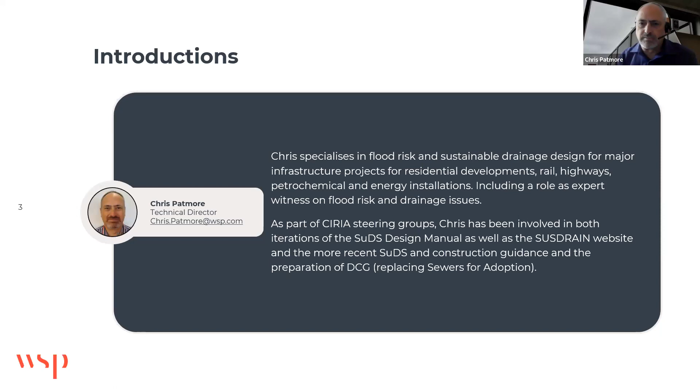So what we're talking about today is the Flood and Water Management Act, and in particular Schedule 3 as it may apply to England. I want to give you a little bit of broad background to that.

But first, I'd like to ask a question, which is, how many of the 260 odd people listening to this webinar have actually heard of the proposed implementation of Schedule 3 in England? I wonder if we could see the results... that's quite a positive result, because I asked the same question a couple of weeks ago of another audience, and it was completely the other way around. That's quite interesting, thanks for that.

So what I'm going to try and cover today, with the help of some colleagues, in particular Ian Titherington, is where we've got to, how it's come about this year as opposed to other years, but also some background as to what's the difference between guidance and regulation and why it's quite a complicated process. Then we'll finish off with a brief summary of where we think Schedule 3 will be, or what it might look like.

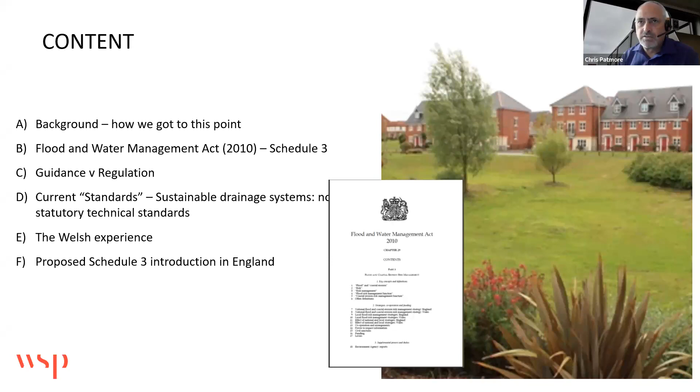So background - why has it all of a sudden come to the fore? In January, the government made a statement, and I've quoted one of the government ministers, Rebecca Pow, who said our traditional drainage systems are under increasing pressure from the effects of climate change, urbanisation and growing population. The benefits of sustainable drainage systems are many, from mitigating flood risk by catching and storing surplus water and reducing storm overflow discharges, to enhancing local nature in the heart of our developments and helping with harvesting valuable rainfall. So this is a statement as to the intent.

And the result of that was that on January 10th this year, a report was published by the government stating that they will now look at the implementation of Schedule 3 of the Flood and Water Management Act in England. It has stated at the time that the new approach is expected to come into force in 2024, so that's literally about 6 months away from now.

As a brief background to where the Flood and Water Management Act came from and its history, it goes back quite a long way to the Water Framework Directive of 2000, but it really came out of the Pitt Review in 2008 that followed the quite severe flooding we had in many parts of the country. It was one of the direct results of the Pitt Review and its many recommendations, and became an act very rapidly.

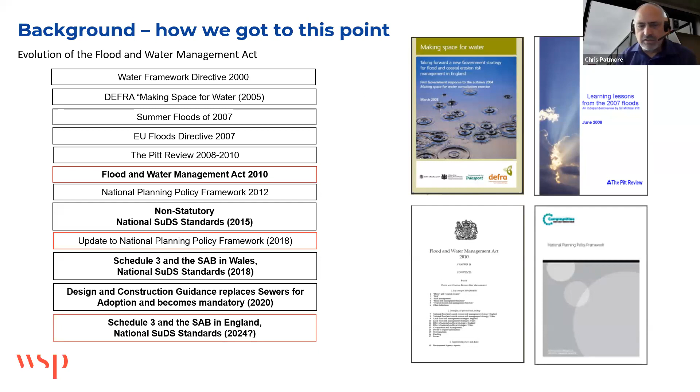So now we're looking at filling that void with a SAB in England. Now we have the example in Wales. As I said, it became an act quite quickly, and established the lead local flood authorities, but it hasn't completely fully come into being.

But one of the key elements of it is this word partnerships, between all of the flooding authorities and elements that are needed to control or maintain flood risk. And that partnership is key to what's coming with the SAB. So local authorities, as part of that partnership, we're looking at setting up agreements between other bodies, internal drainage boards, the Environment Agency, water companies, and look at developing the SAB, which is the SuDS Approving Body.

So as such, it hasn't happened in England. LLFAs were originally funded to establish themselves. And I think most people listening to this webinar are very familiar with the lead local flood authority and how that has changed some aspects of surface water management.

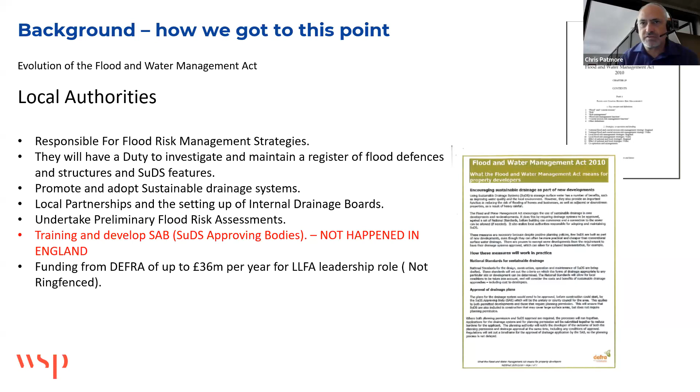On the other side of the fence, we have developers who are encouraged to use SuDS in new developments, but it's not completely mandatory in many aspects. And that's really where the SAB is trying to fill those gaps. That is where we have this shift in responsibility from water companies towards the local authority as a SAB, being the body that adopts and maintains surface water assets.

So this is a different process and a different way of looking at new developments in particular. It's not a retrospective thing at the moment.

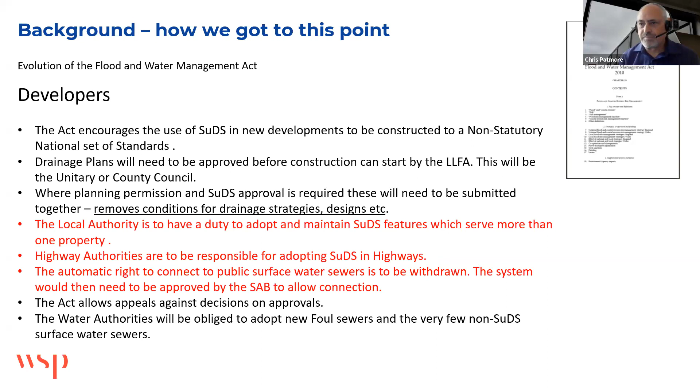So why all of a sudden now? I don't know if you've kept an eye on the industry at the moment, there's been a lot of publications coming out over the last year or so, including the Sewerage Sector Guidance, but also the new update of the manual for streets is going to have more of an emphasis on using SuDS within street and urban realm. We've got reports on reducing the risk of surface water flooding.

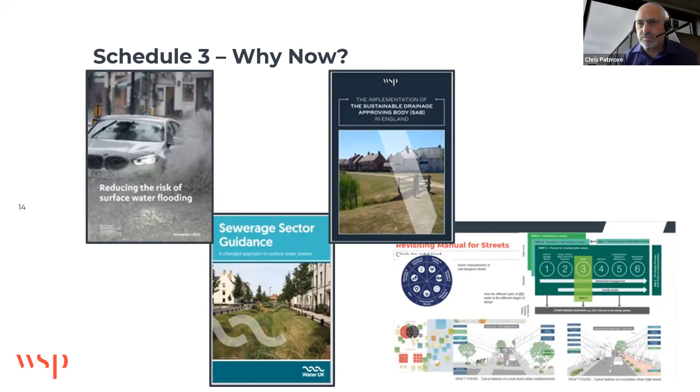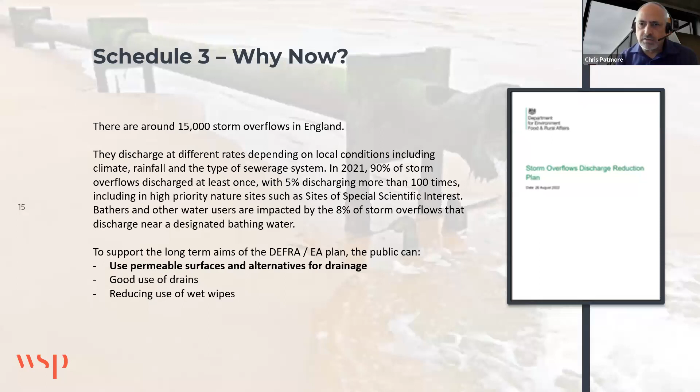We've got key reports in particular on stormwater overflows and CSOs, which again refers to SuDS being one of the options that could help reduce that incident. So there's a lot of elements that are all coming together to suggest that sustainable drainage and its implementation has wide-ranging benefits across the industry.

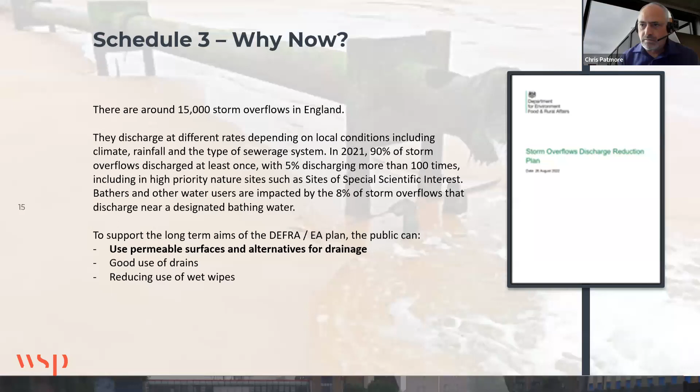So what actually is Schedule 3? It's been under review recently since 2021, and that's when the government announcement in January came out that they will be accepting the recommendation that it should be implemented.

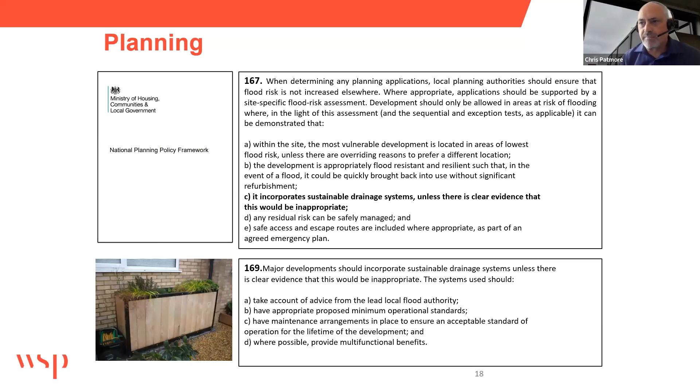The idea is that it then ties in with other documents like the National Planning Policy Framework, which has been rewritten and updated periodically, and more recently it is now getting a bit firmer, a bit more deliberate in its use of words, saying that you should be incorporating sustainable drainage unless there's clear evidence that it's not appropriate. So that has kind of pushed it forward.

We've been involved in a lot of Schedule 3 work in the past, and certainly more recently we're working with DEFRA in looking at how the implementation is actually going to work. Some of the things I'll talk about in a minute will be some of those key tasks and processes that need to be looked at to bring forward Schedule 3, because it's not just a case of saying yes, we'll do it. There's a lot going on in the background, and Ian may be able to run through a few of those from the Welsh experience as to some of the pitfalls, some of the advantages going through.

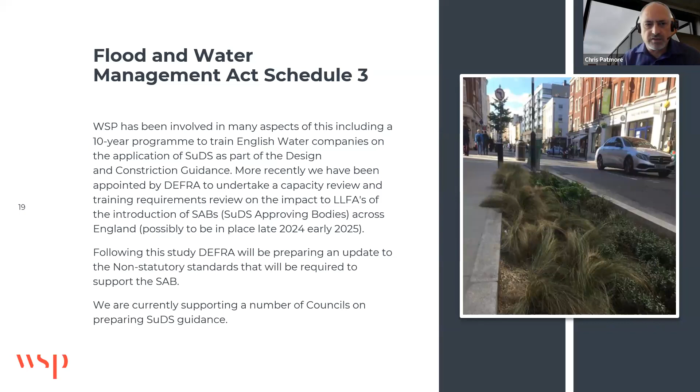So what we're looking at is something that's going to come forward towards next year, and part of the work that we've been doing at the moment is looking at that skills gap, looking at that capacity review, as it's often called, as to what's needed, what needs to change and be included to bring forward Schedule 3. And that includes a lot of stakeholders from both sides, the local authority side, the water company side, the developer side, and the planning system side.

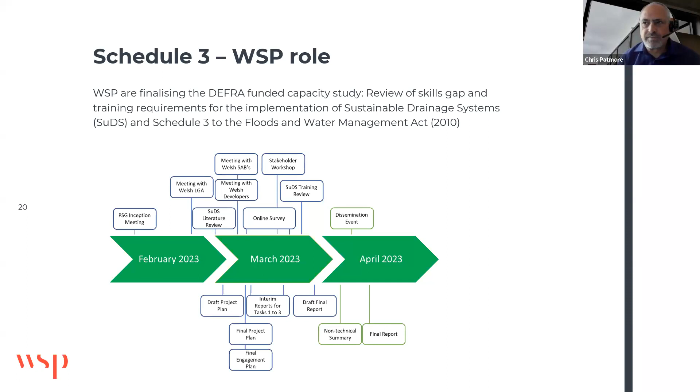What are their interests? What are their drivers? How is that all going to be coordinated? And in particular, the training side of bringing a SAB to the 151 lead local flood authorities that there are in England - it's not a small task, it's a big task. So part of this is that any SuDS delivery process is going to have many moving parts and many stakeholders.

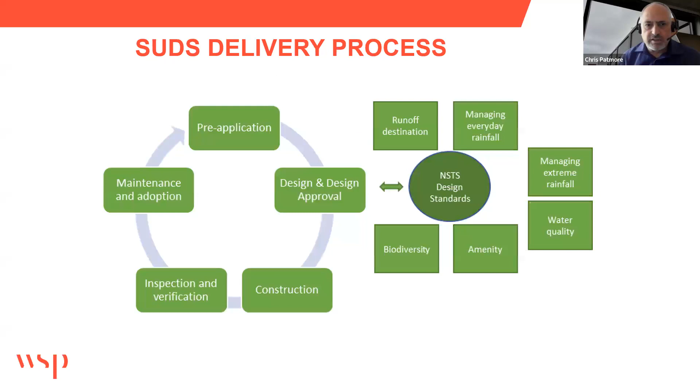It's not as simple as a pipe from manhole 1 to manhole 2. There's a lot of things that get wrapped up into the Schedule 3 and the SuDS approach to drainage, and this includes management of everyday rainfall as well as extreme rainfall. A lot of the guidance and mandatory regulation at the moment is geared around extreme rainfall events, but it's also the management of everyday rainfall events, which is key to looking at other aspects such as biodiversity, amenity, water quality in particular.

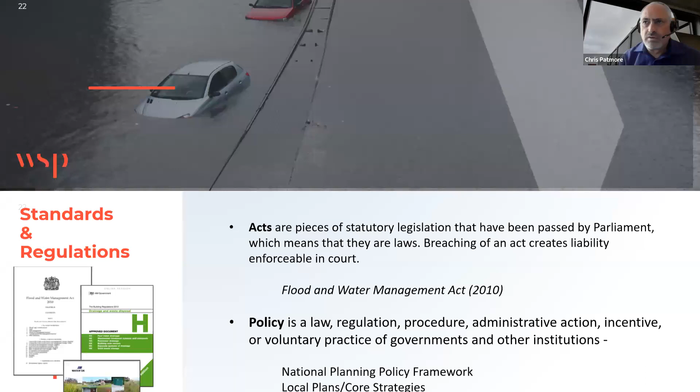So those aspects being brought into legislation will have a lot of key benefits. Just as a small aside, there's the difference between standards and regulation, because there is some confusion in this, and in certain circumstances there are differences.

So Sewers for Adoption, for instance, some of you may be aware that you had the choice of versions 5, 6 or 7, and sometimes in parallel, but they were actually only code of practice guidance type regulation. They were not strictly speaking enforceable, although they were sort of de facto enforceable, whereas the design and construction guidance is actually now the mandatory adoption standard. So it has a different level of background to it and enforceability.

So we have acts like the Flood and Water Management Act, and that's backed up by policy. So we have national planning policy, with local plans and core strategies, and then those are the ones that can be legally challenged, legally enforced. Then you get regulations, which are supplementary to both of those, and in most cases they are taken to be enforceable, but some of them may not necessarily be.

Then you've got a lot of the guidance, like the planning practice guidance within the NPPF. You've got other standards - the SuDS manual, for instance, everybody uses that for SuDS, but it is not a statutory document, it is just guidance. Making it a statutory document is quite a complex piece of legislation. More in keeping with that guidance is things like the building regs documents, which have a bit more standing.

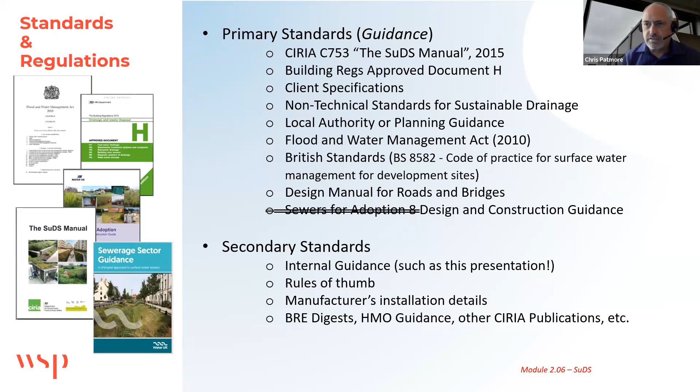And then you have British standards, Design Manual for Roads and Bridges, those kind of things. And then in the background to all of those is guidance that explains how each one of these could be used and applied.

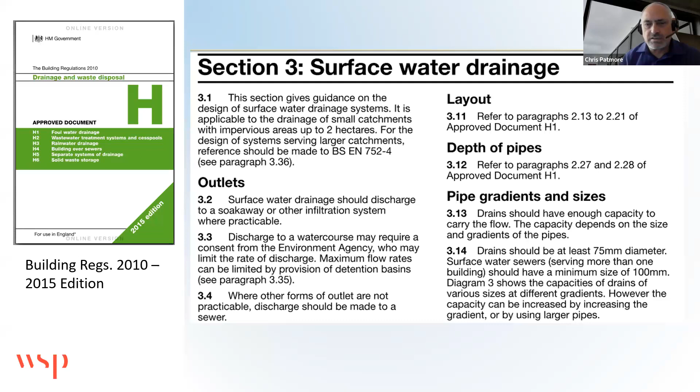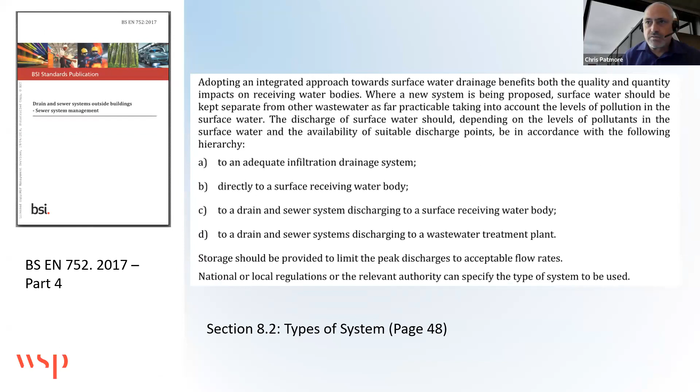So an example of this would be when we're looking at drainage discharge hierarchy, for instance. It's described in many different documents in slightly different ways, and it's knowing where these are - where they're statutory and where they're just guidance. So it's worth being aware of a lot of different documents and not just sticking with one. We have British standards for drainage, which has the hierarchy listed, and building regs has it too - there's documents in the background.

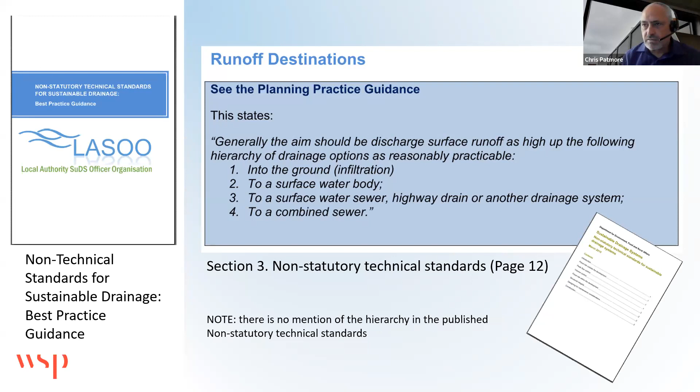This is a historic document devised by the local authority organisation, which tried to define how the technical standards are applied in a consistent manner. Some of this goes beyond the non-statutory technical standards, but is worth knowing about in the background because these things all form a narrative towards where we're going now.

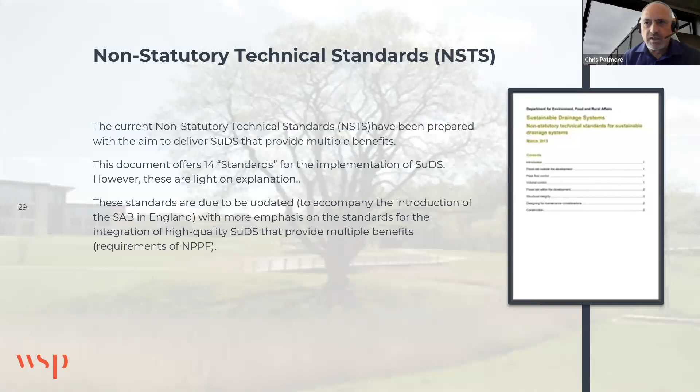So the current standards, if you're aware, there are 14 standards within the non-statutory technical standard for SuDS, which is the sort of official document, but again it's not statutory. And for those who have flicked through its pages, I know it's quite a skeleton of a document, and there's not much in the way of details. The 14 standards only tackle some aspects of drainage and flood risk management.

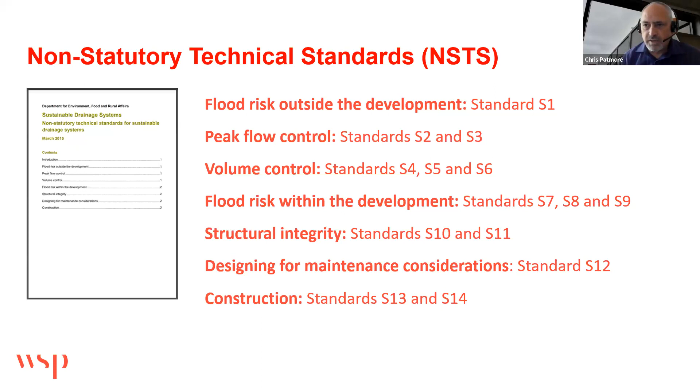So flood risk outside the development, peak flow control, volume control, flood risk within the development, and then the sort of functional aspects of structural integrity, maintenance and construction - those are basically the 14 standards. But...

Because, as I say, the document was kind of a skeleton framework, it needed to be explained. So the LASOO document, Local Authority SuDS Officers Organisation, prepared a guidance note to try and explain how to apply each of those standards in a practical manner. This is definitely a document worth knowing about and referencing, because the elements within this are very likely to come forward in some form towards the SAB.

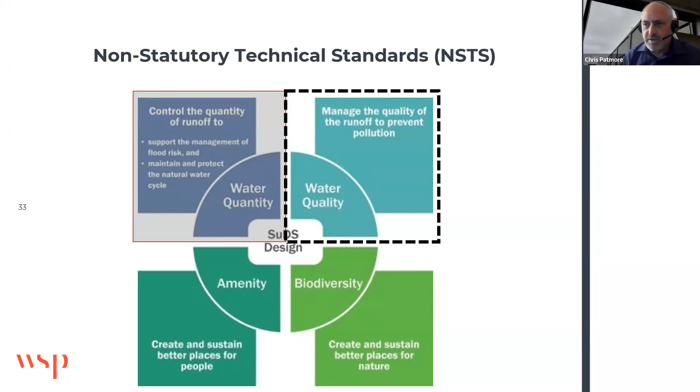So what I was saying earlier is that the non-statutory technical standards only apply some of the SuDS principles, and those principles are around water quantity. They don't really cover much in the way of quality, and they definitely don't cover amenity or biodiversity, which are all parts of the 4 pillars of SuDS.

So I'm going to briefly hand over to Ian, who has worked in Welsh Government from the local authority side to the national side. He'll be able to go through a bit about where the experience in Wales has come from. But before we do that, I'm curious how many people in the audience may have had experience in Wales.

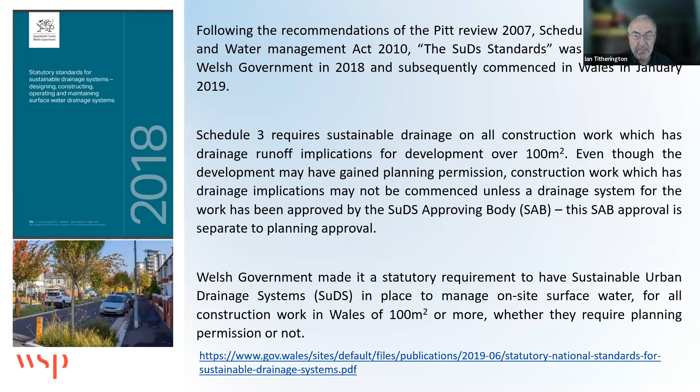Anything over 100 square meters within a red line development boundary where the runoff characteristics change, generally in a detrimental way, that's when the SAB kicks in and you require SAB approval, or you don't build. It's very punitive legislation, a technical appeal, not easy to appeal against, so it's quite strong legislation. People don't get SAB, they don't build - separate from planning as well, independent from planning.

Talking about the role of the SAB, early engagement, as with all good drainage design, is critical. The joy of this legislation is it basically enforces early engagement, making space, designing for surface water before the other statutory services for that site. It's a very, very important message.

Looking at constraints and opportunities at an early stage, I'm very keen to encourage pre-application discussions and meetings. You can get a viability check on the 6 standards as we have in Wales - I think there'll be 7 in England, I anticipate. Get a viability check on those standards before you move ahead with the main design or put a planning application in. So important to have those early conversations - you get a better design and you keep your costs down.

That's why it's important. Treatment trains - the big difference in the legislation is quality, source control and quality of the water runoff. Predominantly that's aimed at highway runoff. 95% of the pollutant off any new development is from parking areas and highway areas, so those are the areas where you concentrate generally the bioretention systems to try and manage the pollutant flow.

Obviously what you do with SuDS is multi-benefits - you try and put a SuDS feature in that does more than one thing, so you're trying to get multi-benefits out of the maximum area, which enables the developer to get the development density they want and the surface water management that you want. Maintenance and operation - very important to design for low maintenance, infrequent maintenance and easy access. Those thoughts have to be there at the beginning of the design. Single body responsible for surface water - well, more or less.

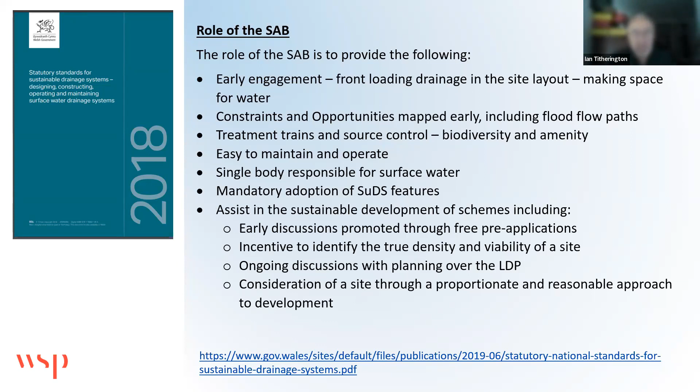And I say consideration of a site through a proportionate and reasonable approach to development. We should be doing that already, but what the SAB does is ensure it happens.

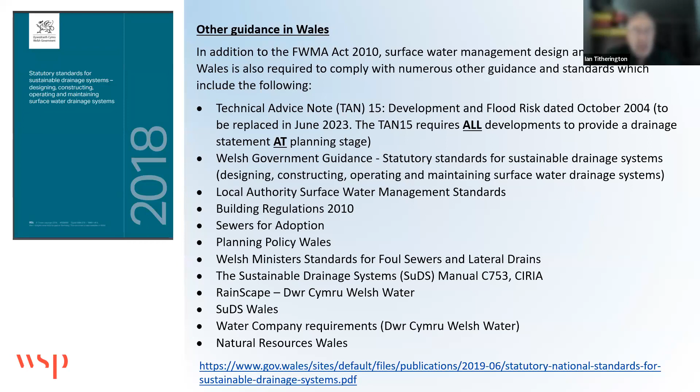So all these documents and bodies are important, but what holds it together is the SuDS legislation. Last week, on Thursday, I remember it well, we finally got the SuDS review. After 2 years, we were hoping to do a full review of our legislation. Obviously, COVID kicked in, so we were delayed.

But Arup worked closely with us for 12 months and published this document, which is on the free link to have a look at. 76 recommendations, the last time I remember. Obviously, the minister has to decide on the priorities and which ones the minister's happy with.

But what we're trying to do under these 4 groups, 17 key areas, is improve the legislation through viable means. What I mean by that is I'm not going to insist that our 22 unitary authority SABs commit huge expenditure to deliver better services. That's not viable because in terms of local government, the resources are not there.

So what we want to do is ask to make changes in terms of the systems, in terms of the applications, clarity.

One good example is we're going to be proposing and tendering for a commuted sums calculator for developers, so they know upfront what commuted sums are going to cost as part of their development. Little ideas like that, in terms of making it easier and clearer for applicants and for SABs to make the system work.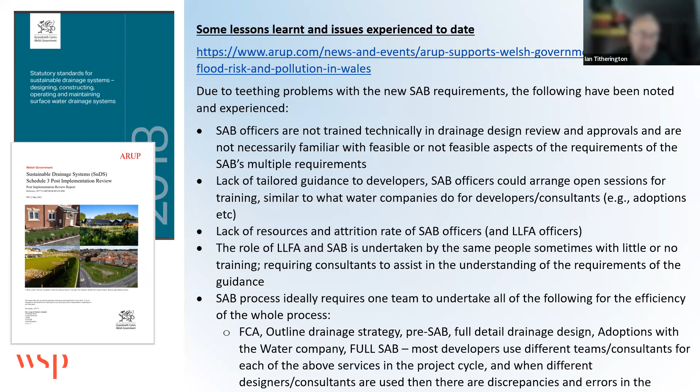And the partnership that Chris referred to earlier, having those relationships between the water authorities and the SABs is very important. With the EA involvement is very important, and the public and private sector as well. Having that conversation about what works and what doesn't, designs that work and designs that don't. It's very important to share best practice, lessons learned.

The pre-SAB applications, there is no time frame. That's a problem. We need to preset that so things don't drag on too long. But also, it's very, very important to have a pre-application system, because that flags up very early if there's a fundamental problem in your design. What you don't want to do is go to full planning application before you've had a check in your SAB. If you do that, you're in trouble. So that's a really, really important message.

The period of 7 weeks is a little short. I'm getting lots of emails in from people saying it's a little short. Normally the water company responds within 4 weeks. It's very, very good, but you need time sometimes with large hydraulic models to check. You need more time on larger developments, or if groundwater testing is required. All these elements need to be thought about in terms of infiltration to understand the viability of the time period. It can be extended by mutual agreement, but once the designs are done, it's important to get the ball rolling on the SAB application.

Requirements being enforced on retrofit, regeneration, brownfield sites - I think for brownfield sites, we allowed a reduction of the amount of water we were stopping and letting off site. To be honest, no, we're probably going to be moving away from that. Brownfield sites should be treated as anywhere else, because generally a brownfield site is a dilapidated site anyway, so the system's not working. So any system you're tapping into shouldn't be based on its original capacity - it should be based on its current conditions. So I think there are limitations about what we can give in flexibility in terms of brownfield sites.

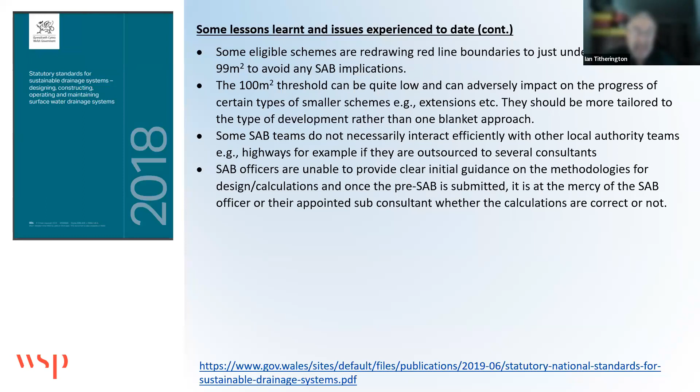In many ways, it's easier to use the SAB system than to use the planning system with conditions. Something England will find when the legislation came in - there was a rush of applications a few weeks before the SuDS legislation kicked in. A lot of housing developments with thousands of houses thought it was advantageous to avoid the SuDS legislation and do pre-SuDS legislation. It wasn't actually. What's happened, ironically, is some SAB applications have overtaken the ones that were put in beforehand, because of the complications of doing drainage conditions outside SAB. Actually, the SAB system, if used properly, is actually quicker and not slower than doing it through standard drainage conditions. So it's a bit of an urban myth about SABs necessarily slowing everything down. If it's a good application, it should fly through. If it's a bad application, it won't fly through. As simple as that, because if we don't like it, we'll stop it.

As you say, I think Chris is probably going to take over from me now in terms of what's going on in England. We are working very closely with our colleagues in DEFRA to help them set up the structure and system. It's fairly similar to the Welsh legislation, with some suggested changes we put forward, and also some different structures in England that would hopefully enable a smoother running legislation. There'll be questions and answers at the end, but that's my bit for now. Thanks very much.

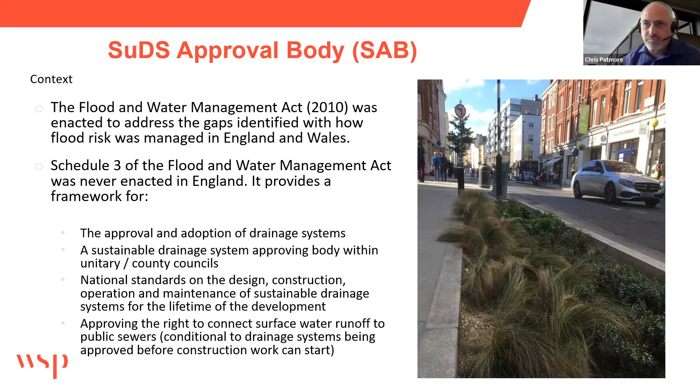Thank you, Ian. That's really useful. And as Ian alluded to, the review is basically not an independent review that ignores what's gone before. It's using information from the Welsh experience to help structure and inform a way forward.

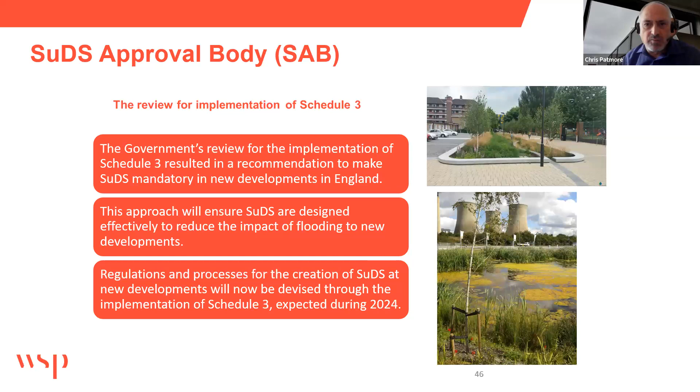And it is to do with effectiveness to reduce the impact of flooding and reduce the impact of water quality problems, but do it in a structured way that makes sure it happens far more than the ad hoc way it does at the moment.

So at the moment, it looks like in England it's going to follow a similar model. It's going to be an extension of the authority and processes of local authorities, in terms of lead local flood authorities most likely taking on that role. There might be some nuances in certain areas where resources need other facilities and companies to bridge some of the gaps.

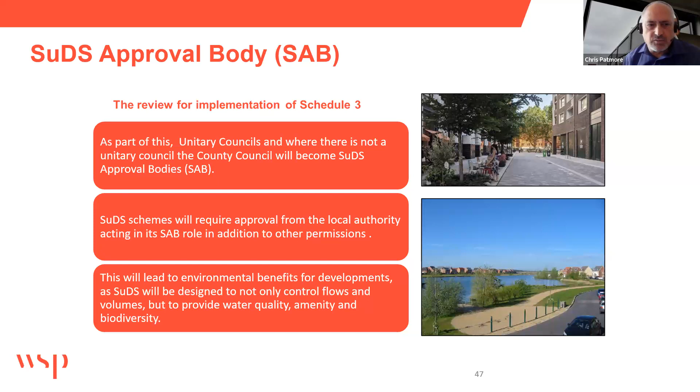But we will be looking at a completely SuDS-orientated way of surface water management. So that's not only the quantity we were talking about before, but quality, amenity and biodiversity. Particularly, many of you have probably heard the term biodiversity net gain flying around in the background. So there's that aspect which a lot of SuDS features can intrinsically help with, as well as not being a standalone aspect of the development. Try and incorporate those multifunction bits.

So at the moment, as mentioned by Ian as well, we have these standards. Currently there's 14 standards, and as said before, they're mainly around quantity. The work going on in the background at the moment with DEFRA and various other bodies is a review of the standards, and 6 main standards are going to be updated, shown on the right hand side. So runoff destinations - this runoff hierarchy is going to have more emphasis within the documents.

There's going to be a new standard on what's called everyday rainfall. As I said before, everyday rainfall has much bigger impact on controlling water quality than the flash flood peak, 1 in 100 etc., with climate change. If you can manage the everyday rainfall, you will reduce the loading on water treatment works, you'll reduce the loading on CSOs, and you'll improve water quality from all your destinations.

And then modifying standards for extreme rainfall, making that a bit clearer, a bit more consistency, but also introducing standards on water quality, amenity and biodiversity. Certainly the latter two are going to be the ones that might be a little bit harder for pure engineers to pin down and explain in a suitable way that can be applied to a drainage process.

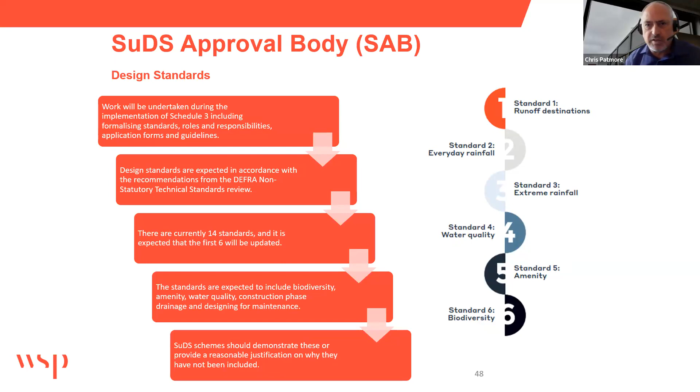So what we're looking at is, again, there's still mention of projects larger than 100 square meters. And if you bear in mind that at the moment a lead local flood authority may not be consulted on anything less than 1,000 square meters, or a hectare, or 10 houses, that is a massive step change in the number of applications being reviewed and the level of detail they're reviewed at.

As said a few times today, the SAB approval is essential before you build. If you don't have that approval, you will not be allowed to build, and it sits outside and parallel to the planning process.

These SuDS and adopted features kick off with 2 or more dwellings or units, but they need to be accessible. They need to be similar to adopted sewers. They need to be able to be accessed and maintained.

There is going to be a review of how permitted development rights and Section 278 agreements function within this process. It is thought that a lot of highway schemes and modifications that fall outside of planning will be brought into the SAB process.

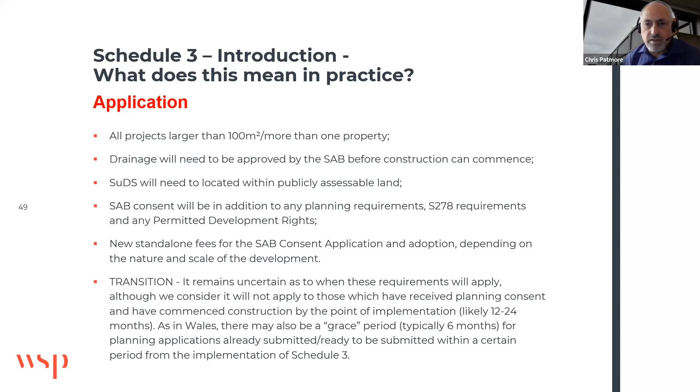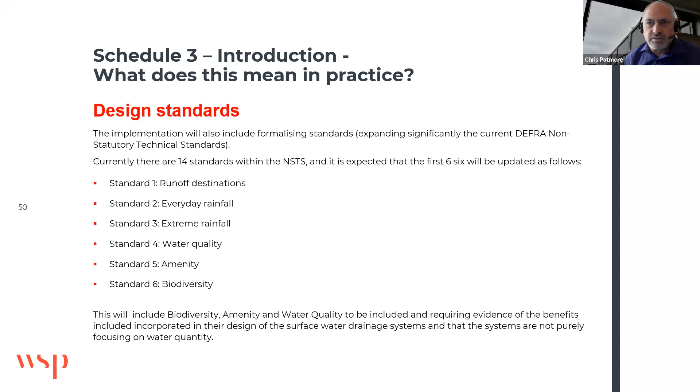So, as I said, the main key thing working in the background is this rewrite of the design standards. I think I've discussed most of those at the moment. The other standards will still be in there, the construction, the maintenance, those ones, but these additional ones of everyday rainfall destinations,

water quality, biodiversity, and amenity will be new aspects to it. The actual process is likely to be very similar to the Welsh process. As Ian was alluding to, the pre-app submission, the pre-app consultation is vital in streamlining the whole process.

And then you have to get this consent, which revolves around the SAB submission, similar to a submission that you would do to a water company. But the difference being that the SAB would then take on the operation and maintenance of that water system. And it may then interact with a water company downstream, but that part of it is outside of the process.

And the adoption and maintenance becomes a key aspect right at the beginning of any application. So this brings the whole of drainage right up the importance of any master planning process. It's not a case of here's a master plan, fit some drainage into it. This really does bring it to the fore where it can influence and should influence parts of the master planning.

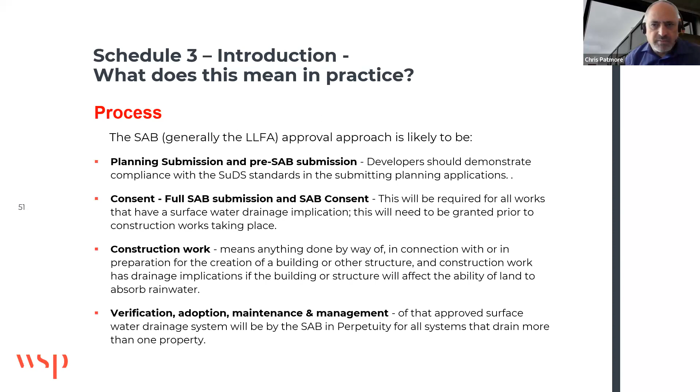And the SAB being part of that partnership alongside the designers would help ensure that whatever's approved at planning then makes it through the whole stages through to development and then maintenance and operation. And so there's a few key summaries in there.

There is this need for greater standards of SuDS. It's got to be clearer to everybody involved in it, from the SAB officers through to the planners, through to the designers and the developers, that the standards are being met and they're being met consistently.

And as I said, there's 151 lead local flood authorities. That's potentially 151 different ways of doing things. It needs to be standardized. But that means more information on things like commuted sums, on things like design standards of inlets and outlets, and maintenance of the landscaping regime, all of those things.

And that in turn needs larger teams within the consultancy side of it and within the SAB side of it, because they are now dealing not just with the numbers in terms of cubic meters of storage, but you're dealing with flow rates, what happens in a drought situation, what soils are you using, or engineered soils, planting, landscaping, public access, all of those kinds of things are going to be melded into the same process. So all of those sorts of things are envisaged to come through.

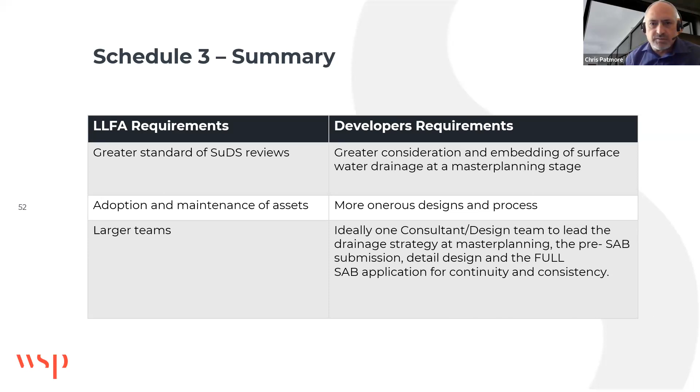Now, that is generally the end of the talking bit of it. And we have a third question which has been run in the background, but also we have this Q&A side of things, and it's just to gather a few thoughts on what you would consider the advantages and disadvantages of introducing Schedule 3 into England. It'd be just interesting to find out from you guys what you feel about that. So I think there are some elements in the chat already. So if I come out of the presentation, I think we can look at the chat.